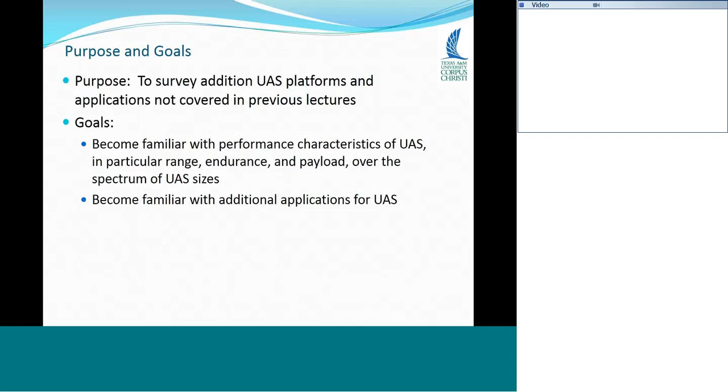But again, still, what we're primarily interested in is just getting a broad overview of unmanned aircraft platforms in terms of size, range, endurance, payload. Just get an idea of what's out there, how big it is, what kind of payload it can carry, and what it's doing. Okay.

So again, this is another one I need to update. The technical society for aerospace engineering is an organization called the American Institute of Aeronautics and Astronautics, AIAA. They've stopped doing it most recently, but in the past they have done an annual UAV roundup in their monthly magazine. And so in July, August 2013, they did this roundup. They've done some since, so I need to update the information, but this just gives you the idea of what's going on.

So in 2013, the number of nations that were producing unmanned aircraft was 57. 57 different countries around the world were in the business of manufacturing unmanned aircraft. The number of manufacturers worldwide was 270. The number of different unmanned aircraft being built, just the different types, was 960, and it took 30 pages in the 2013 UAV roundup to cover all these. So it just gives you an idea of the scope of the industry.

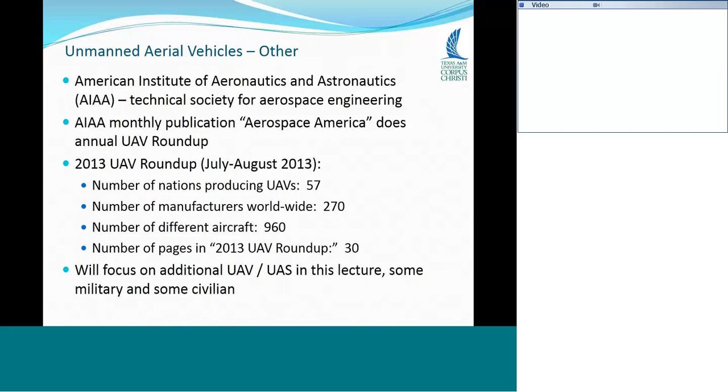Okay. So we're just going to add some platforms to the ones we've already discussed, some military, and then some, in this case, civilian. Okay, now this is one that I think has both applications. This is an Austrian unmanned aircraft, the Schiebel Camcopter S-100. It has a heavy fuel engine option.

So in addition to burning avgas, which is kind of the standard thing for piston engine aircraft, it can also burn some of the jet fuels. So JP5, Jet A, or JP8 jet fuels. These are heavier, they're kerosene based, okay? But it can burn those as well. As the typical payload we expect, EO/IR camera.

It has a payload capacity of 110 pounds, maximum takeoff weight of 441 pounds. The length is 10 feet, and the height is 3 feet 8 inches. You'll notice that basically those struts at the bottom are its landing gear. And in the bottom picture, there's an application. Actually, I think it has the possibility of firing a missile, I believe. So that was obviously a defense application.

Max speed 138 miles an hour, range 112 miles, endurance 6 hours, so it stays in the air a fairly long time, which is particularly good for a helicopter like that. And the service ceiling is 18,000 feet.

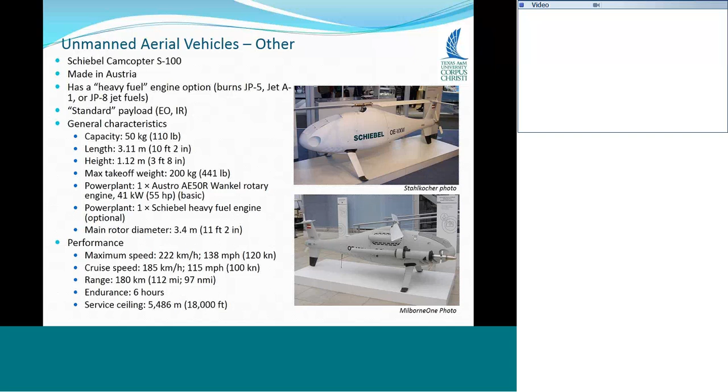Now, kind of on the other end of the helicopter spectrum, this is the small unmanned aircraft, the quadcopters like the DJI Phantoms that we look at. So this is the Aeryon Scout. It's a Canadian unmanned aircraft. EO/IR, you can see in the picture there, basically the camera looking at you, the ball at the bottom of the aircraft. This one's controlled by a tablet PC interface, so basically a tablet or pad or whatever.

Piloted by pointing to an area on the map. Height is controlled using a scroll on the touchscreen interface. So basically you have a map and you just put your finger on the spot on the map where you want the thing to fly to, and then over to the side there's a scroll bar and you move that up and down to adjust the altitude. And there are a number of other aircraft that do that as well today.

See how big it is? It's about a little over 2 feet square, and each of the rotors is about 2 feet in diameter, about 1 foot tall. The loaded weight is 3.1 pounds, maximum takeoff weight 3.74 pounds. So it's not heavy. LiPo battery.

Okay, let me take that back. Each of the propeller diameters is a foot. The rotor diameter is basically 2 feet plus the separation between the propellers. So, yes, I messed that up a little bit.

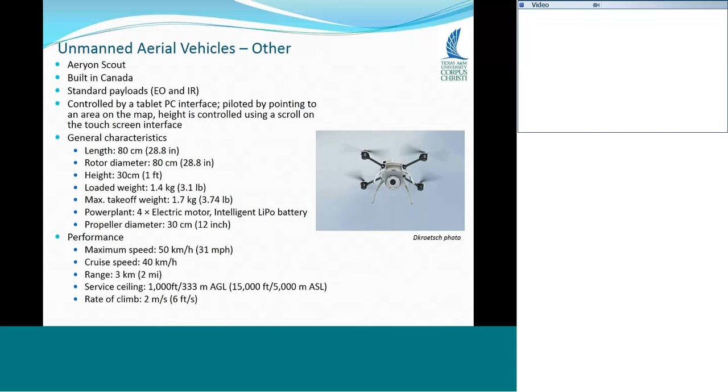Okay, on the other extreme, this was a Chinese unmanned aircraft known as a Pterodactyl, or the Wing Loong 1, which you see there on the side of the aircraft. Just showing this one because it looks very familiar to the Predator. Same general layout. You see the V-tail in the back, got the large nose at the front carrying the antenna, has the ball turret on the bottom with the sensors, EO and IR, carries a synthetic aperture radar.

You look at the size, just under 30 feet long, just over 45-foot wingspan, gross weight 2,425 pounds, 3-bladed propeller to the back. So you see the range, 2,485 miles, endurance 20 hours, service ceiling 16,000 feet. So these are numbers that are very similar to the Predator. You can see this one does carry munitions. So that's just a representative Chinese unmanned aircraft that looks an awful lot like an American unmanned aircraft.

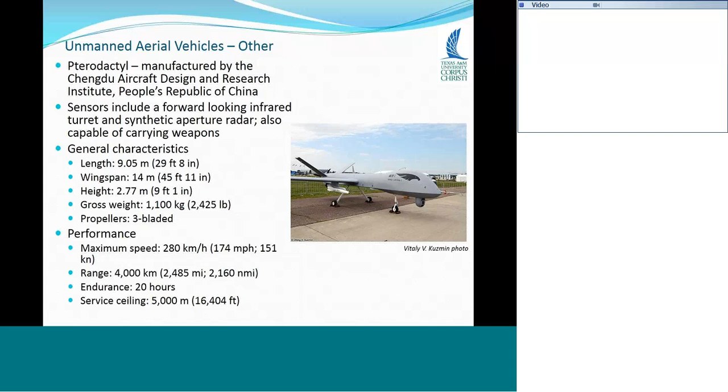Okay, now this is the Heron. This was related to the Hunter, but a more advanced version of it. A larger version, you see in the bottom photo how big this thing is. It's a very large unmanned aircraft. It's referred to as a MALE vehicle, medium altitude, long endurance vehicle. When we were looking at those high altitude unmanned aircraft in the other lecture, those are referred to as HALE, H-A-L-E, high altitude long endurance. Okay, this is a MALE, all right?

So sensors, infrared, visible light, surveillance, standard camera system. You see the ball turret under the chin. Also communications intelligence, electronic intelligence, various radar systems. You see again the antenna mast on the nose, on the top of the fuselage, just behind the nose. Not one of the more attractive unmanned aircraft, in my personal opinion, particularly because of that antenna mast or whatever it is.

Now this thing could be flown in either a fully pre-programmed autonomous mode. You punch a button, it takes off, flies, does a mission, comes back and lands, or manual real-time remote operation. So it could be under manual control the whole time, or a combination of both. What's impressive to me is that this thing does have a fully autonomous method of operation where it can literally on the ground, push a button, it takes off by itself, flies its mission, comes back and lands by itself. You see it's a pusher configuration, twin boom, horizontal stabilizer joining the booms at the back.

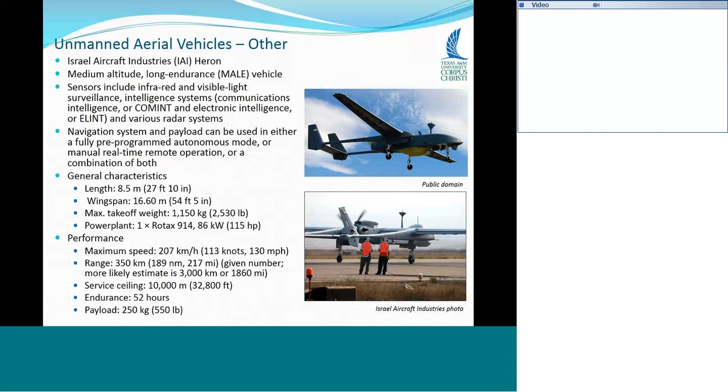Okay, now the replacement for the Heron was the Eitan, again, another Israeli product. You see a picture of it here. It's even bigger. Now it has a maximum takeoff weight of 10,250 pounds, 4,400 pound payload. This thing can carry a lot. Wingspan 86 feet, length 43 feet.

Now it's a Pratt & Whitney turboprop, the PT6A, which is actually a very, very common turboprop engine used on a lot of aircraft. Max speed, and I don't have the number there for miles per hour. Range 4,600 miles, endurance 70 hours. Okay, this thing can carry a big load. It can carry it a long time to a great distance.

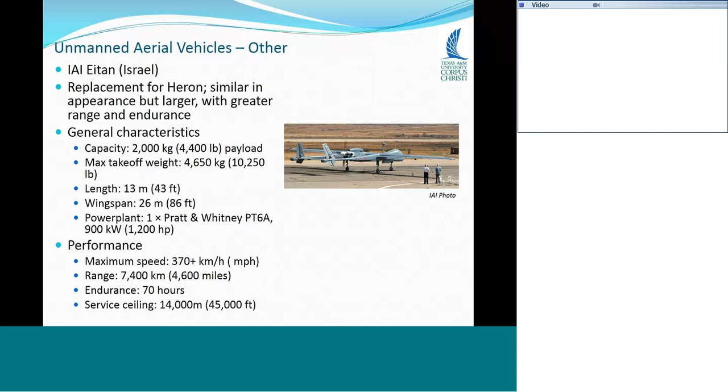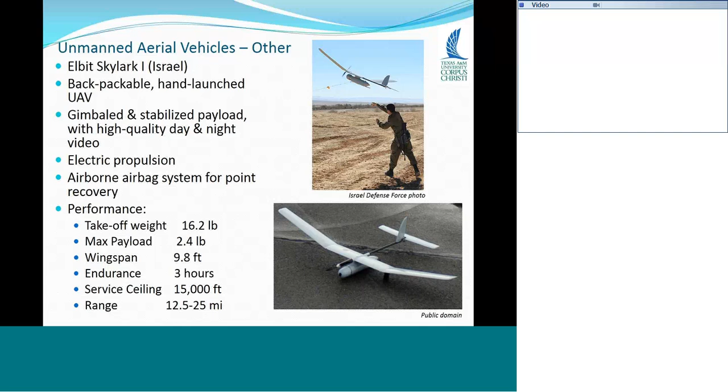But again, I wanted to include this one in particular because there are a number of unmanned aircraft being built now that have this configuration, including the Skylark 2, which is the upgrade of the Skylark 1. Now this one requires a catapult launch, but still has the airbag landing. So you can't just hand launch it. It has to be launched with a catapult, but then it can be landed with parachute and an airbag.

It has a multiple sensor payload, video camera, and a forward-looking infrared camera, also with a laser with auto tracking capability. So a number of additional things in the payload, which is in this pod underneath the fuselage. Again, you notice closely here, the electric motor which pulls this thing is basically on that stick that's the fuselage. It's kind of a minimalist unmanned aircraft.

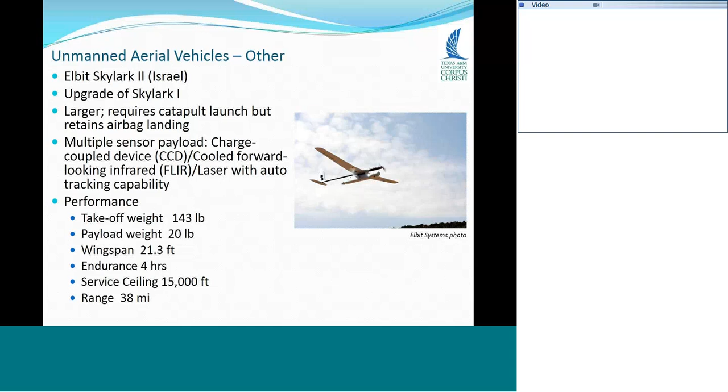But now it's considerably heavier. It's 143 pounds, so you're not just going to toss it. It's almost 10 times the weight of the Skylark 1. Payload weight 20 pounds, so now that pod underneath can carry more stuff. Wingspan 21 feet, endurance 4 hours. And again, it's electric propulsion, so 4 hours endurance, that's very good. Likely the pod underneath has some additional batteries. Range 38 miles.

Okay, another coming to be common battlefield reconnaissance UAV is the Silver Fox. Now initially developed by the Navy so they could fly it around and spot whales and other sea mammals in the operating areas. They're about to begin an exercise and they don't want to run into a whale or anything. They would use these to fly over and spot them. Then they got a request from the Marine Corps for tactical reconnaissance, intelligence, surveillance, and target acquisition unmanned aircraft for small units. Okay, so they developed this thing.

And so you see the operations. It has this compressed air launcher, which basically can be set on top of the case. There's one case for the launcher, another case for the aircraft, and this launcher thing can basically be set on top of the cases. And so there's the launcher. It has a cylindrical fuselage with a kind of rounded nose. To me, the characteristic feature is the pistons sticking out of the nose. You can kind of see it in both photos. To me, that's just kind of a distinguishing feature.

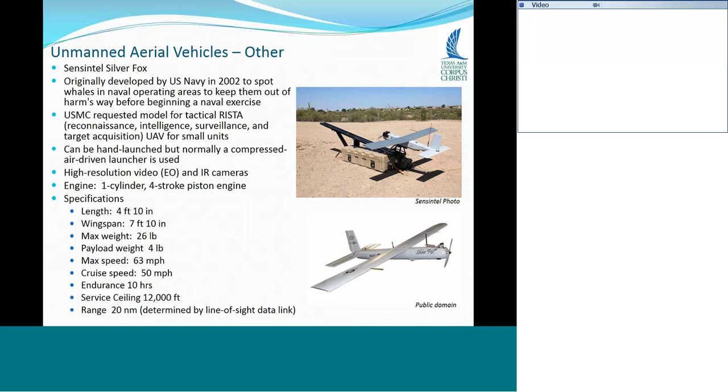All right, another relatively small unmanned aircraft. This is the Insitu Aerosonde. That's kind of an interesting corporate history. It was first developed by Insitu, which is a company now owned by Boeing. It was built in Australia by Aerosonde Limited, which was acquired by AAI, which was then acquired by Textron. I think what happened was Boeing bought Insitu, spun off the Aerosonde to this company to build, Aerosonde Limited. That company got bought out by another company, which got bought out by another company.

So anyway, it was designed to collect weather data. So this is not just the standard EO/IR payload, but it was designed to basically fly over oceans, other areas, and collect temperature, atmospheric pressure, humidity, wind measurements over oceans and remote areas. Okay?

So multiple sensors on board, not just cameras. They would do polar survey missions. They use a digital camera, an infrared thermometer, air pressure, temperature, humidity sensors. Okay, so this thing was built to basically make atmospheric measurements. It was actually built as a scientific unmanned aircraft to make atmospheric measurements. And it was the first unmanned aircraft to cross the Atlantic Ocean.

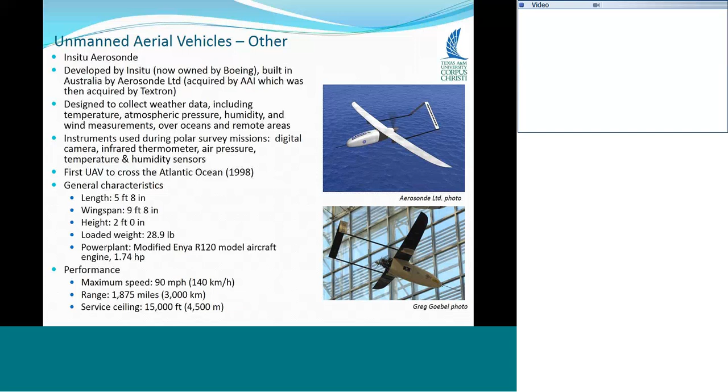Okay, now this is one of the early unmanned aircraft operated by the U.S., AAI RQ-2 Pioneer, which is an upgrade of the Mastiff that we've discussed before. The Mastiff was one of the first twin boom pusher configuration unmanned aircraft. Well, this was essentially one of the first to go into operation in the U.S. military, and actually it was initially developed for naval use.

They wanted to mount these on battleships to provide gunnery spotting. Basically, you've got battleships, you're firing these massive cannon that can send shells 20 miles downrange. Well, you want to be able to go out there and look and see where they're landing. So that's kind of the purpose of this thing, which is why it was a rocket-assisted takeoff aircraft.

You see that happening here in the picture. Basically, it's a zero-length launch. Did not require a runway. Can be launched directly from a ship, and I have seen photos of that happening. You can probably dig them up on the internet. Now, eventually, this led either directly or indirectly to other aircraft, in particular the Shadow. But it was in service for a while.

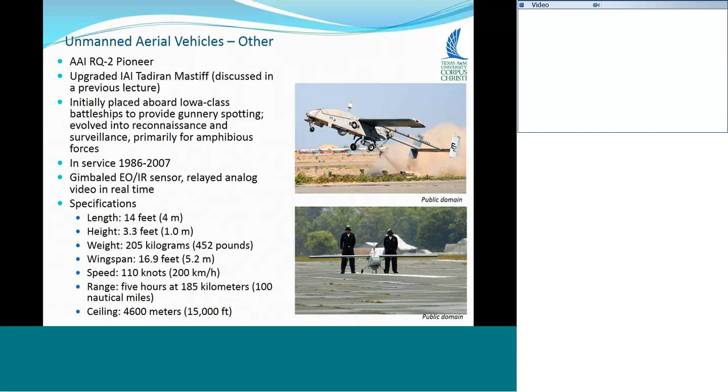Okay, now this is a Czech unmanned aircraft. This is a smaller aircraft, as you can see there in the picture. It's a target drone, so we're back to that. But it's a smaller drone. It's a higher speed drone. The speed is 244 miles an hour. Okay, so it's designed to be high speed, harder to hit. So for target practice.

And there's a rail launch. You don't see the complete rail. You see the carriage it sits on when it launches. So there's basically something that accelerates it along the rail and then it launches. Wingspan of 6 feet. So it's a little bit bigger. It's kind of hard to see the picture, but actually a little bit bigger maybe than I suggested. Length 4.5 feet. Height 1.8 feet.

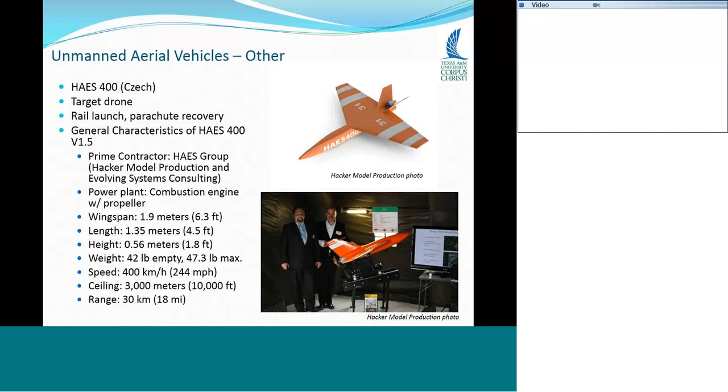It's the belly lander. There's no gear on it. 47.3 pound maximum takeoff weight. Again, we said speed 244 miles an hour. Nothing here about endurance. Not supposed to be flying a long time. It's a target. Fly up to 10,000 feet and has an operating range of 18 miles.

Okay, and we talked about the Scan Eagle in a previous lecture. Well, this is what's supposed to come after the Scan Eagle, the RQ-21 Blackjack, and notice it's an Insitu product, which is now a Boeing product. But again, it's supposed to replace the Scan Eagle. Same type of recovery system, the Skyhook system, so it snags a hook on the end of one wing and brings it down, as you see in the bottom right-hand picture. It is bigger than the Scan Eagle, about twice as heavy. Maximum takeoff weight is 135 pounds.

Now, one of the main configuration differences is, if you remember the Scan Eagle, it was just the fuselage and the main wing. It was basically a flying wing. The main wing was more swept. The wings went back a little bit more, but that was it. On this aircraft, you see they've added the twin booms, the twin vertical stabilizers to the back, and then the vertical stabilizers connected by horizontal stabilizer at the top. So that boom rear control surface assembly was added, relative to what the Scan Eagle looked like. Probably to address some stability and control issues. That would be my guess.

So, like I say, I think the Scan Eagle is maximum takeoff weight in the range of 60-something pounds, and this is about twice that. Wingspan is bigger, 16 feet. Max speed 104 miles an hour. Cruise speed 63 miles an hour. Endurance 24 hours. It stays in the air for a while. Service ceiling 19,500 feet.

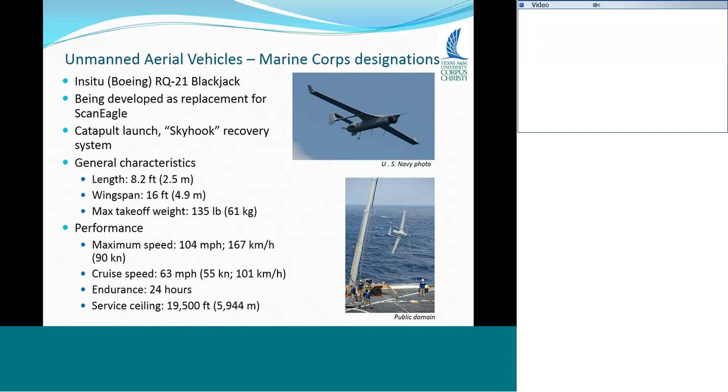Okay. Now, this is the big brother to the RS-16. Arcturus is the company that made the RS-16 platform that American Aerospace then took and did some modifications and sold to us. Well, this is the T-20. So it's also a belly lander. It's basically the same configuration, same kind of geometry as the RS-16. It's just bigger. And so you see in particular the ball turret sticking out of the belly. That's the way that the Arcturus line normally works. But it is a belly lander, so you really hope that retraction mechanism works when you get ready to land this thing, or you just had a really bad day.

So again, an EO/IR camera on this independently pointable, targetable ball turret sticking out of the bottom. This was the first unmanned aircraft to see and avoid a general aviation manned aircraft using an ADS-B transponder. The ADS-B transponder is the technology that's going to replace the existing transponders, and it allows aircraft basically to talk to each other. We'll talk more about that later. But this one had it mounted on it, and they did a test. A manned general aviation aircraft flies presumably an intersecting flight path. And so this thing was able to detect it and then figure out, okay, I need to go some way to avoid collision. And so that's what happened.

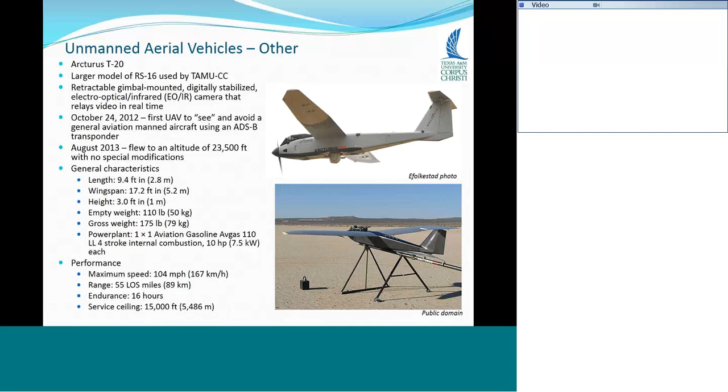Okay, now this one is, well, we don't know a whole lot about it. This is the RQ-170 Sentinel. It's presumably a secret aircraft. Now, probably what we know about this thing is from the fact that one was brought down by the Iranians in December of 2011, okay, and intact, roughly intact.

Now, there was either a system failure or there is some suspicion that it was spoofed, that basically the Iranians somehow managed to take over control of the aircraft while it was flying and force it to land. Then they came out with one very similar to it. I'm not sure how well it's flown, but anyway, I think basically that's how we know what it looks like, pretty much. This is actually an image produced by someone who's building models of these things, a computer-generated image.

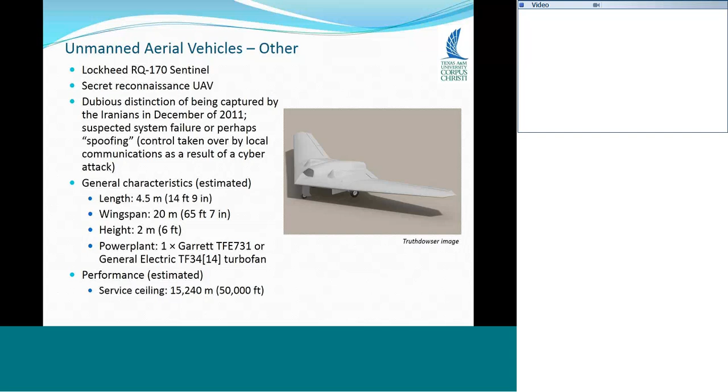So these are all estimated. It has a turbofan engine. Don't know how fast. Probably flies up to 50,000 feet. We just know they're there. We don't know exactly what all they can do. Someday we probably will, not yet. So, but we know they're there, okay, because one did get brought down, and so we know about it. Okay, but that's kind of the opposite extreme end of unmanned aircraft.

Now, a different application, a non-military application. One of the things that unmanned aircraft are being used a lot for these days is surveying, aerial surveying. Because with the GPS information we have, with the camera capabilities, with the ability to precisely locate points on the ground in relation to the images that we acquire of those points on the ground, these things are becoming very valuable for surveying, okay?

And so what this thing does, this is a Polish unmanned aircraft, Pteryx, delivering data for generating digital elevation model using external photogrammetric, always have trouble pronouncing it, photogrammetric software and orthorectification procedure, data for precision agriculture, obtaining surface maps using mosaicing software. So kind of what we do with the RS-16, but a lot more accurate. Okay? It has this kind of unusual configuration.

Basically, you have the fuselage with this pylon on the top, and then the wing sits on top of the pylon, and the motor's up there. Electric motor, 9-foot wingspan, 1 foot height, max takeoff weight 11 pounds, so they're not heavy. Can stay in the air 55 minutes with about a 2-pound payload. If it has a lighter payload, you can put more batteries on it and stay in the air for 2 hours. Okay, cruise speed 75 miles an hour.

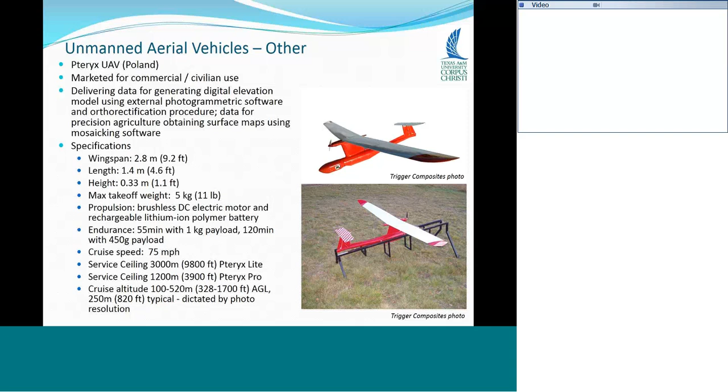And you see the service ceiling, but you don't necessarily want to be flying high when you're doing surveying. So the cruise altitude is typically 300 to 1,700 feet, depending on the resolution you want the photo. Remember, the RS-16 at 1,000 feet, the resolution for each pixel is 2 inches on the ground. Okay, so if you need higher resolution, you fly lower. So you might be able to fly at almost 10,000 feet or whatever, but you don't necessarily want to if you're doing survey work. Okay, so that's the purpose of this aircraft.

And one basically doing the same thing is the Areohawk, which is manufactured in New Zealand. Looks a lot similar to the Puma, actually. But same thing, it's surveying, basically taking a photograph and turning it into a high-resolution map. Okay, Google Maps, they do this kind of thing. Okay, now this one basically has just a Sony camera in it, a very high-resolution camera, a 16-megapixel camera with a 15-millimeter ultra-wide survey lens.

So a lot of these payloads, you'll see them, and they'll basically be some kind of metal frame, and it will just have a digital camera like you would buy at Target or Best Buy and go out and take pictures with, where that same camera body with a similar lens is just sitting there, such that it's pointing down out of the belly of the aircraft. So you see, it's fairly light, 12 pounds, hand launched, electric motor, stays up there an hour to hour and a half, 37 miles an hour. So again, another surveying application.

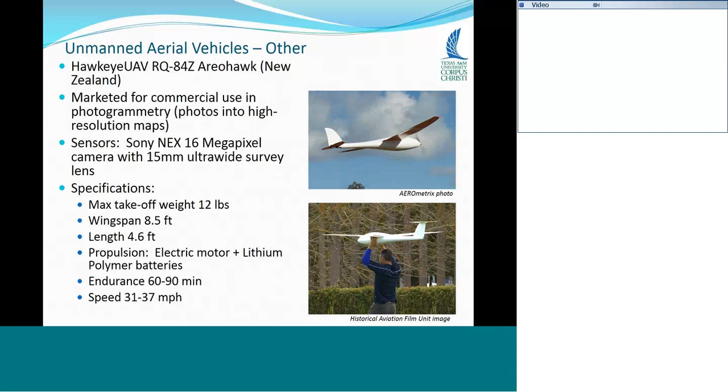And a third surveying application is the senseFly eBee. You see the picture there, that's actually Dr. Michael Starek. He's a professor in GIS here on campus, does a lot of surveying work and research into how you go about doing surveying work with things like this.

And this is a very popular surveying platform. Again, a 16-megapixel camera, electronically integrated control. The thing about these is that they have that and they have differential GPS. So, very precisely the location of the airplane, because you have differential GPS and an onboard INS system, so you know the orientation of the airplane. So with all these things, you can get a very accurate mapping of the point on the ground.

When you take a picture and you figure out, okay, in that picture, this point is on the ground at a certain place, you need to compare it with where that point actually was, it's very close. Sometimes it's on the order of millimeters, the error. So it's very, very highly accurate. He has used this to actually make maps over campus and has mapped other places as well. But you see how big it is.

So it's light. It's only about 1.5 pounds takeoff weight, 3-foot wingspan, staying there 45 minutes, up to 1.9 miles with a radio link. So that's, again, an example of a fairly common surveying platform.

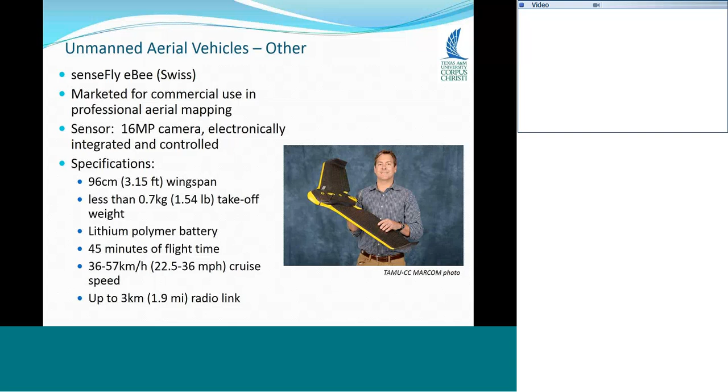Then the last one we'll look at in this lecture, way at the other end, this is the Northrop Grumman X-47B. This is known as a UCAV, an unmanned combat aerial vehicle. Okay, some of the thinking is that at some point, fighters that fly in the air are not going to have pilots in them. They're going to be unmanned. They're going to engage in dogfights or do whatever without a pilot on board. Okay, so this is one of those aircraft.

Notice it looks not too different from the Sentinel, which was a Lockheed product, but typically the mission will drive the configuration to a particular design. So it's not uncommon to see multiple configurations that look a lot the same if they're doing the same thing. Now, this one was designed to be flown from a ship, and so these photos are from basically, you've got to test it. You've got to see if you can take off and land from ships.

Well, I believe what they did first was launch it from the ship and land it on land. So they manually loaded one, used a crane or whatever, put it on the ship, took it out to sea, launched it using the catapult system on the ship, and then landed it somewhere on the land.

Then the next test was to launch it from the land and land it on the ship, so using the hook system, the tail hook and all that to retrieve it. And then the final test was to launch it from the ship and then recover it on the ship. And they managed to do all of that in 2013. So you see how big it is. Length is 38 feet. Wingspan is 62 feet. Okay, so it's fairly big.

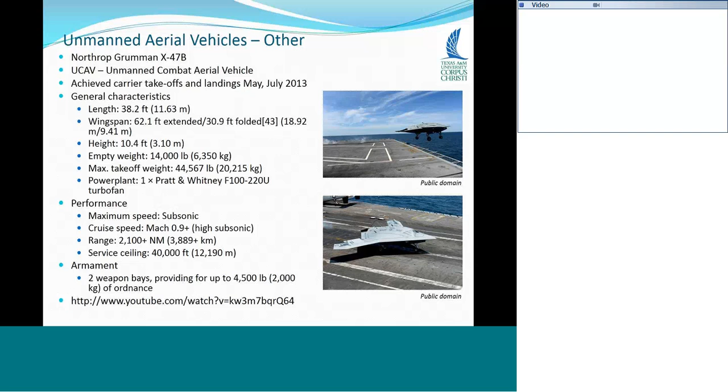Okay, well that concludes this lecture, and this also concludes the unit. So the next unit, we will start looking at some of the technologies within unmanned aircraft. I believe the next topic is actually controls. So we're going to start looking at what it takes to actually control these things. We're going to get down kind of at the guts of the aircraft. So I'll conclude the lecture now, and we'll pick that up with the next lecture.